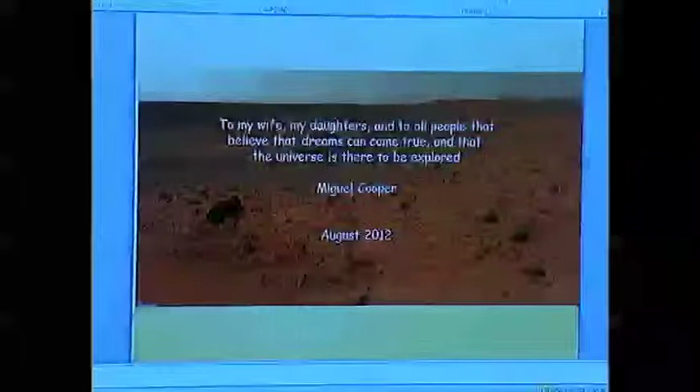Miguel Cooper, also known as Mike Cooper, wrote this presentation, and he opened with the following words, quote, "I would like to dedicate this presentation to my wife, who is here with me, to my daughters, and to all the people who believe that dreams can come true, and that the universe is there to be explored."

I would like to begin this presentation with this slide, which shows what can be achieved through the use of imagination, creativity, and science. Some of the great minds behind these creations have enabled mankind to advance and to look for better improvements. The author of this presentation, Mr. Miguel Cooper, or Mike Cooper, has included some thoughts which he finds to be quite interesting and inspiring.

From Viking to Curiosity, the exploration of Mars has gone from dream to reality. Imagination has made it possible for human beings to create these vehicles. This presentation will give us an idea of how human beings could set foot on Mars using today's technology and experience combined with new launchers, space vehicles, and emerging technologies.

The idea of this reconfiguration is to take advantage of the hardware which is already in orbit and to extend its use for this project. In fact, the ISS will continue its operations, but with fewer modules. Now, ISS stands for International Space Station.

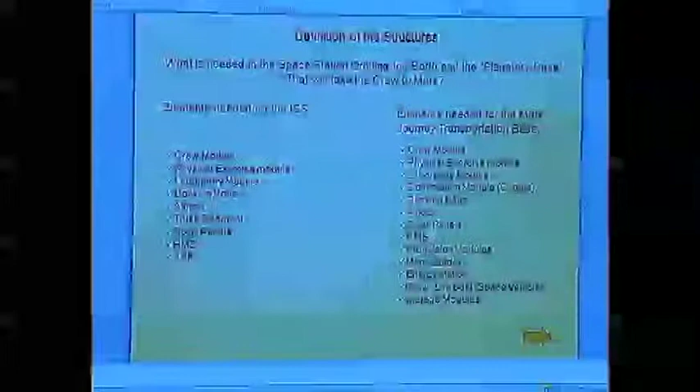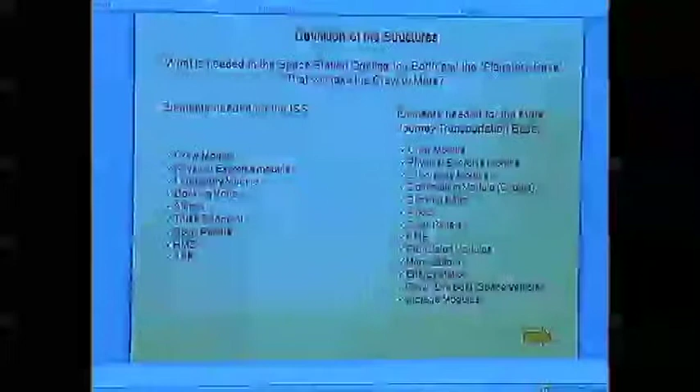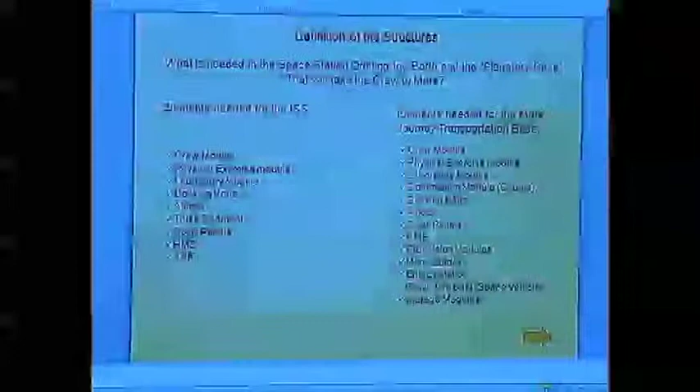So, additionally, new elements need to be defined, designed, tested, and sent into orbit. One advantage of doing it this way is the fact that the space vehicle can be tested while it is in an orbit around the Earth. Potential problems can be solved before leaving the orbit around the Earth, without going all the way to Mars.

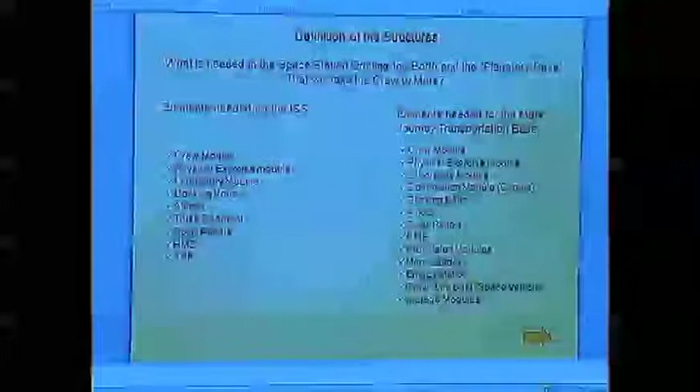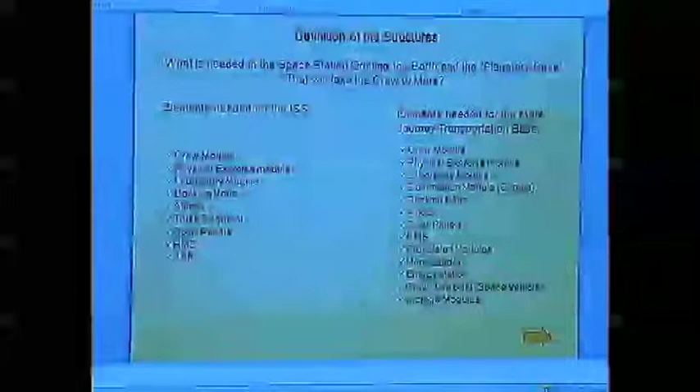Now remember, I told you ISS was the International Space Station. So a good knowledge of all the elements and modules which form the ISS, or International Space Station, today is required in order to be able to select the ones that make sense for the Mars project. We should keep the functionality of the ISS in mind. We should also remember the additional partners.

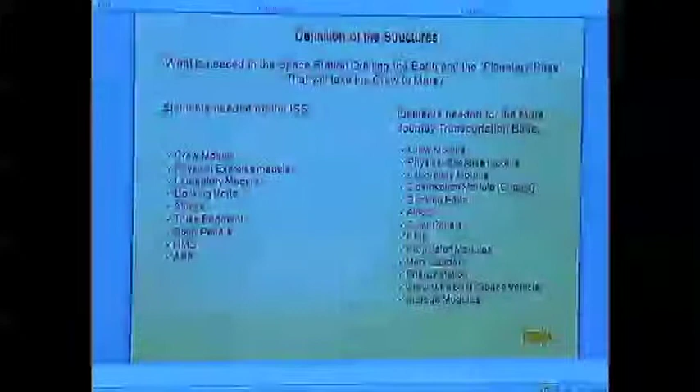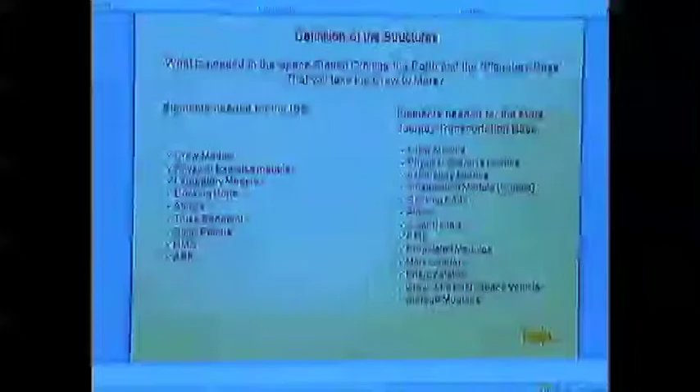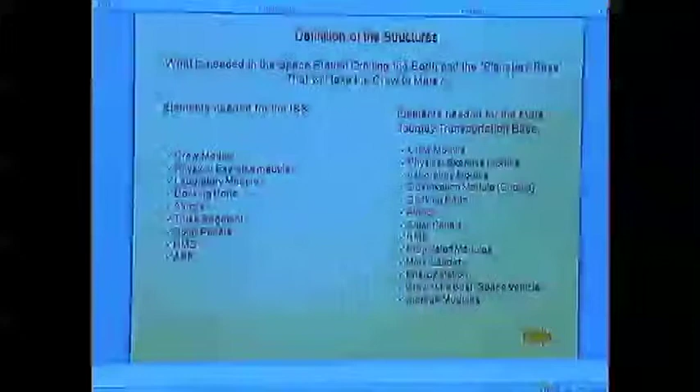First of all, we will identify the elements that the ISS and the MOS will need to operate and to complete their tasks. Now, for the benefit of those people in the audience who need to know what the letters MOS stand for, the MOS is the Mars Orbital Station. Just as the ISS is in orbit around the Earth, the MOS will orbit around the planet Mars.

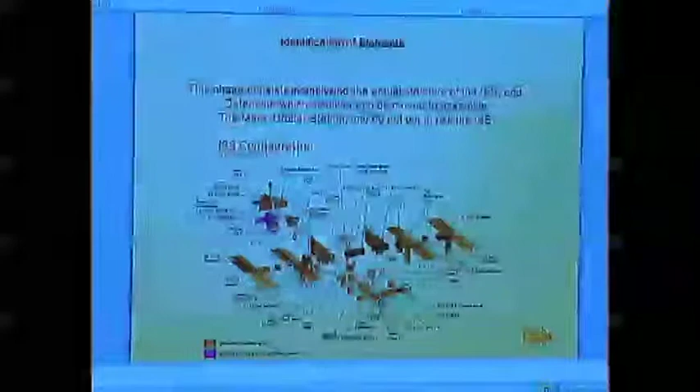A good knowledge of all of the elements and modules which form the ISS today is required in order to be able to select the ones that make sense for the Mars project. We should keep the functionality of the ISS in mind. We should also remember the international partners, the risks of each configuration, and the implications of reassembling the various modules.

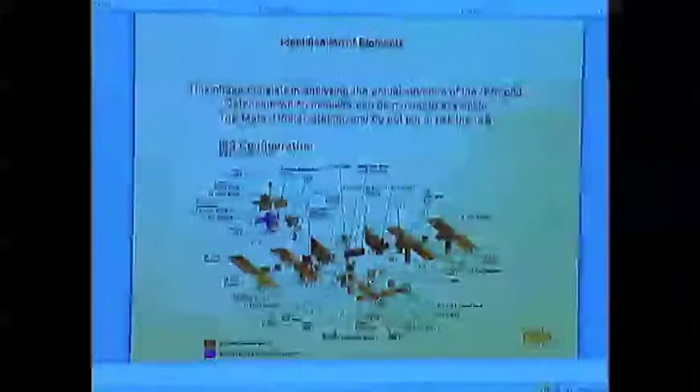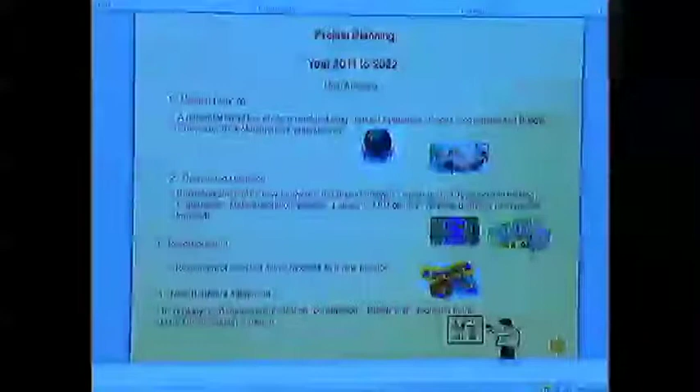As in the case of every project, this project has several major groups of tasks which need to be addressed. Using a time frame of 11 years, from 2011 to 2022, the main groups will include the following 4 task groups. Task group number 1 will be mission planning, and you can see it here on the screen. Mission planning is the first task group, and this task group will address the planning of the mission. It will define the objectives and goals.

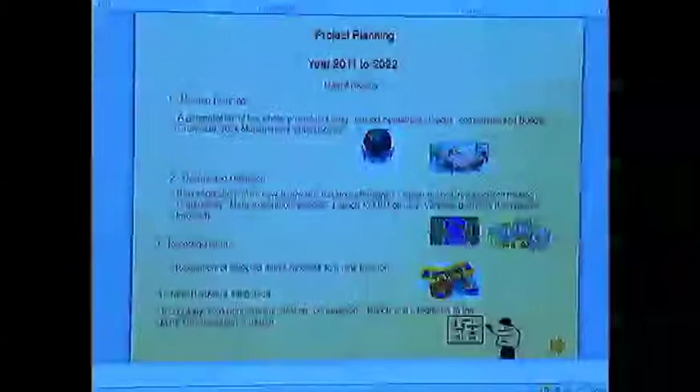It will develop a general consideration of hardware and people, including administration, mission control, crews, NASA and international partners, participation plans, the role of private companies, vehicle status, possible budget items on a yearly basis, etc. Task group number 2, which you can see on the screen here, is design and definition. This task group will arrange for the reconfiguration of the ISS and MOS, that is International Space Station and Mars Orbital Station.

It will define new elements, select companies to develop conceptual designs for launch vehicles, for spacecrafts, and for a Mars rover. It will organize a possible mission control team and define a mission control center on the Mars Orbital Station. It will evaluate risks. It will design the Mars exploration plan, and for both the minimum and extended missions, vehicles should be defined according to standard definitions.

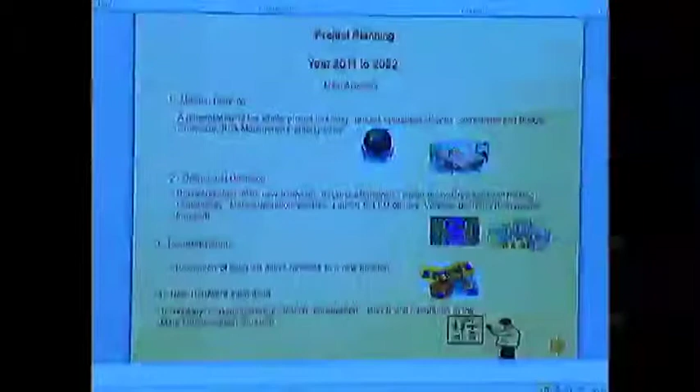It will design both the minimum and the extended versions of the Mars exploration plan. It will identify the supplies and parts which need to be included in storage modules. Task group number 3, that will be assembly. This task group will relocate ISS modules while building and testing new hardware. And task group number 4 will be the new hardware integration task group.

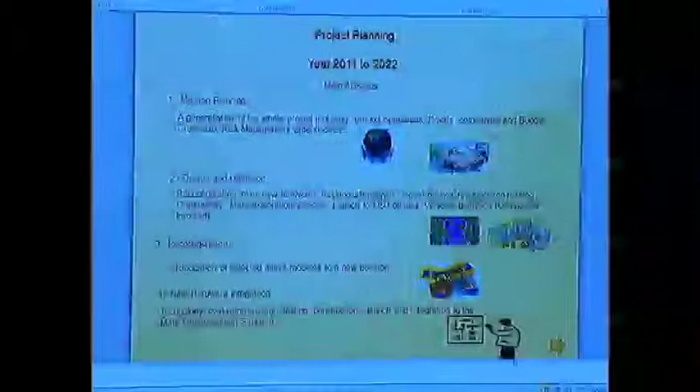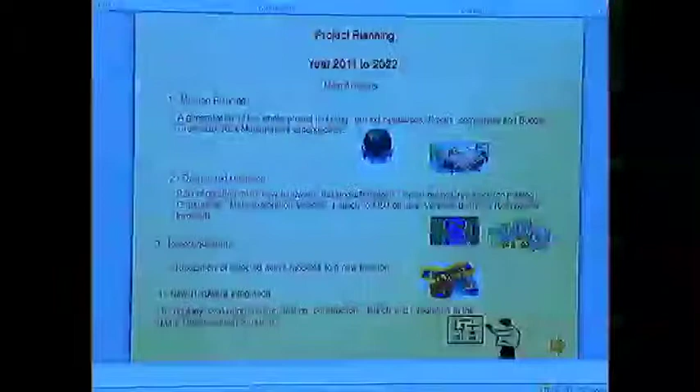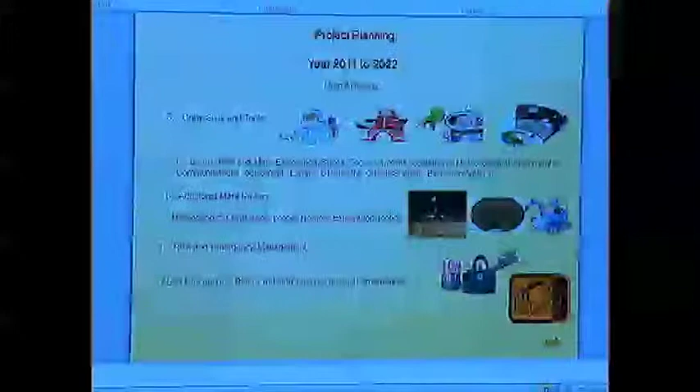This task group will test completion of the propulsion systems for the MOS, launch vehicles, crew space vehicles, Mars lander, rover, and return vehicle. It will also define a tentative schedule to launch and assemble these various components. Now let's talk about astronauts' tools and suits. This task group will design the suits to be used aboard the MOS for Mars exploration. It will design the tools needed for repair activities and for the exploration of Mars.

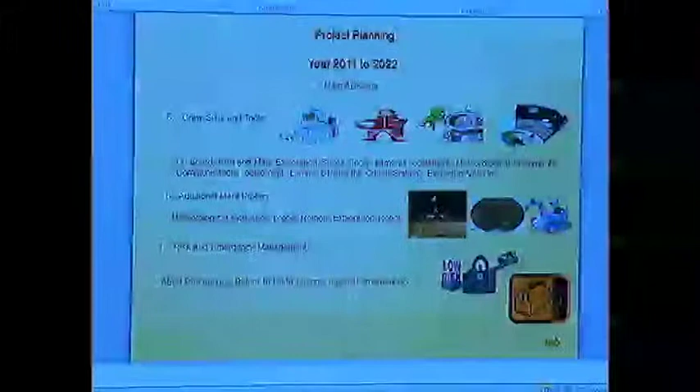Now you can see the additional Mars probes task group. They will consider if additional Mars probes need to be taken for atmospheric measurements before landing and for Mars observations after the crew departure. Also, it will consider what equipment may be left on Mars for unmanned exploration. And finally, you have the Risk and Emergency Management Task Group. A special group will be working on each stage to identify the risks of every phase and to develop the details of the abort and emergency plans.

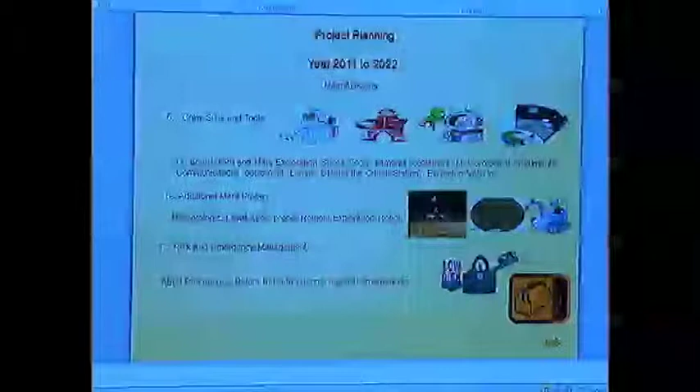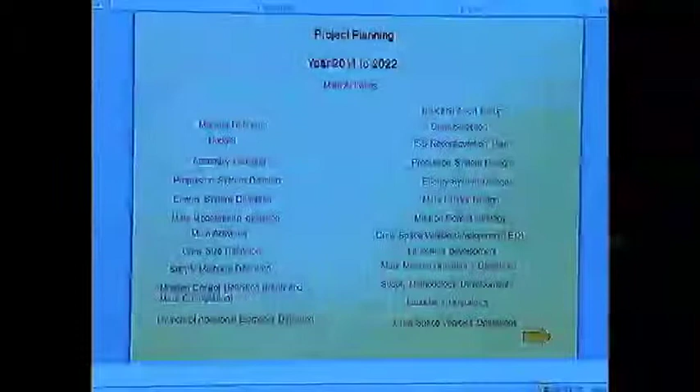These major groups of tasks are divided into more specific activities. As you already know, each activity will have its own project planning. These two slides will show some of the activities which should be included in this project. I will not go into all of the details for each one of these in this presentation. It would be too much detail. Now, once again, as in the case of the previous slide, these major task groups are divided into more specific activities.

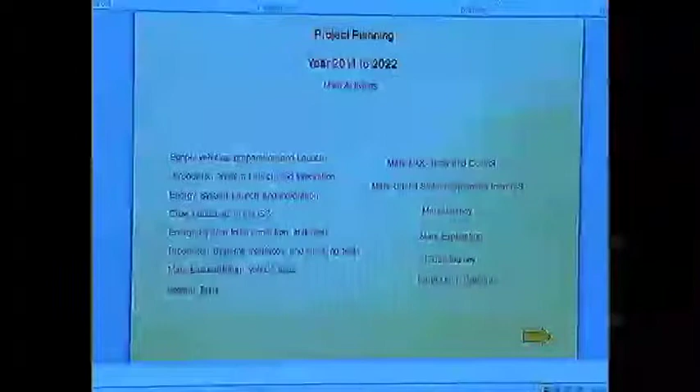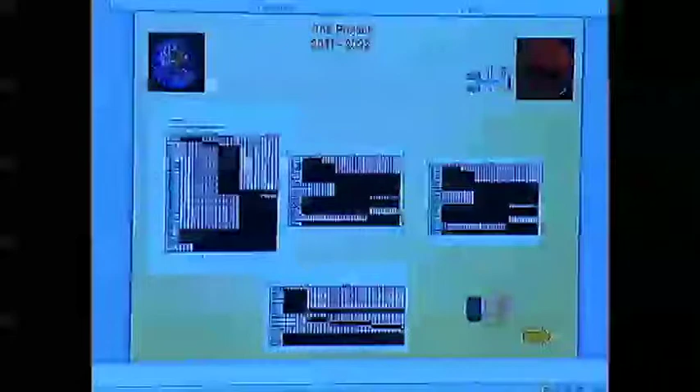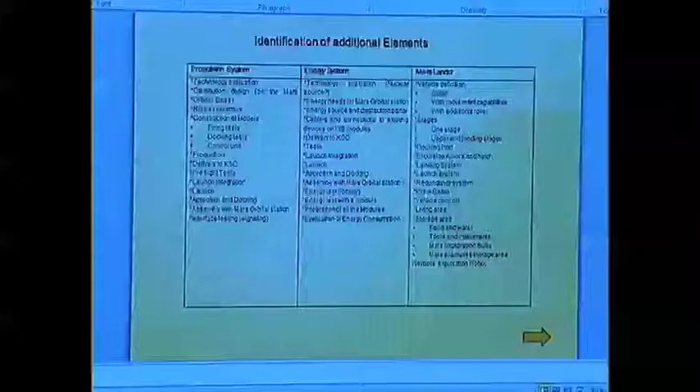The propulsion system will provide course corrections and speed reduction in order to enter into an orbit around Mars. After the exploration of Mars, this component will leave the Martian gravitational field for the journey back to Earth. Route corrections and speed decreases will be used in order to enter into an orbit around the Earth. Because the spacecraft will be traveling at a very high velocity through outer space, in order to enter into an orbit around the Earth, it would have to slow down.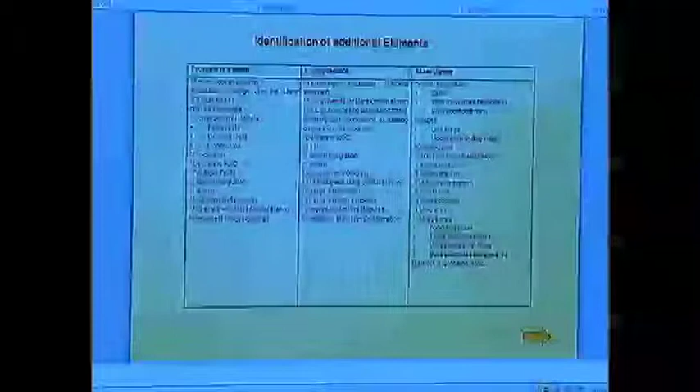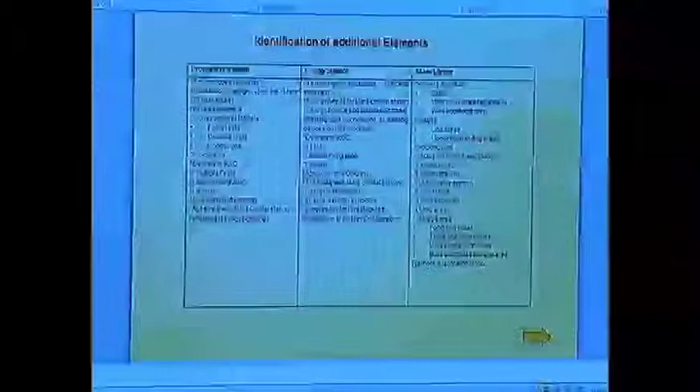Now you can see system number 2 at the top, the energy system. The energy system will be used to store energy and to provide energy to operate all the modules of the Mars orbital station. And then item number 3 says Mars lander. The Mars lander represents a combination of a lander, storage for tools and supplies, a rover, and the return vehicle. The use of each system involves an appropriate technology, concepts evaluation, manufacturer selection, design, prototype construction, and testing.

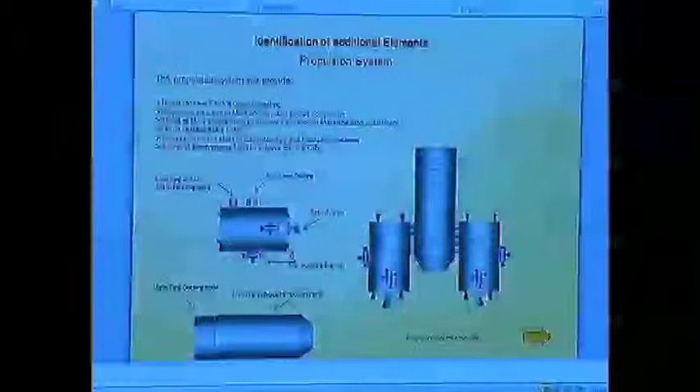Now here's the propulsion system. Let's expand on this. This system is formed by a module which contains propellant to feed 2 rocket systems. Each of these rocket systems has a main engine, secondary engines, and route correction engines. Inside is a propellant, which is to be used by the secondary and correction engines. The main module has the computers and interfaces which are needed to control the engines.

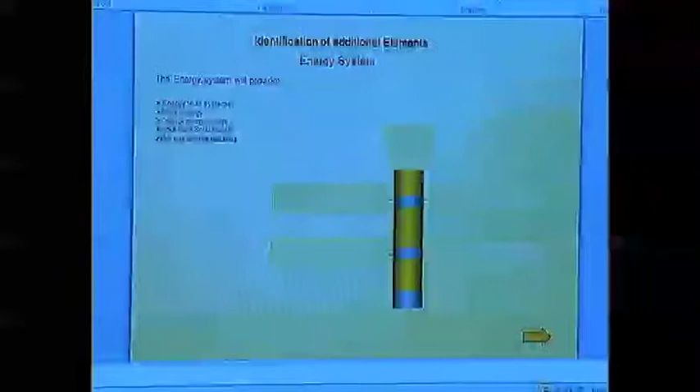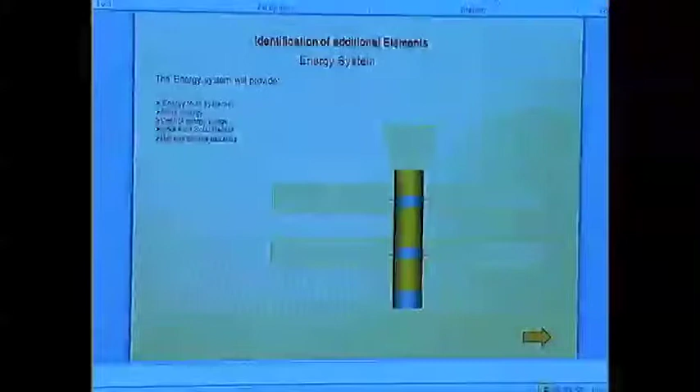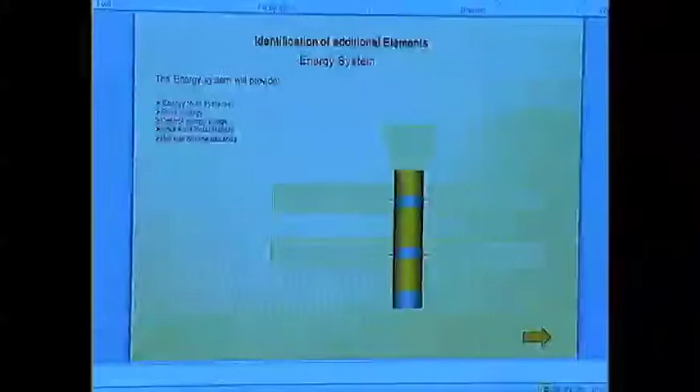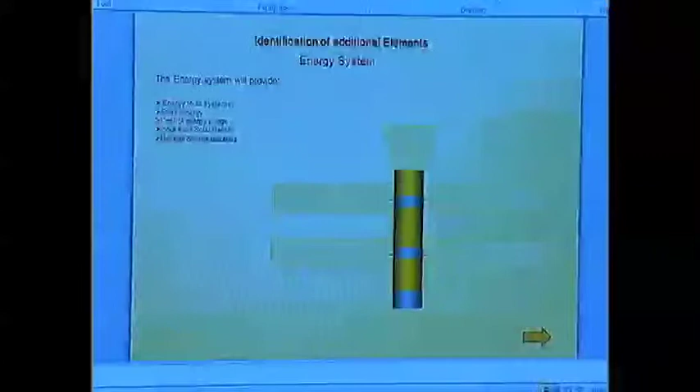All right, let's take a good look at the energy system here. The energy system is formed by a module with solar panels, which can be extended and retracted, along with the capability to follow the sun. This module is covered with solar cells in order to capture solar energy and to store it in its internal batteries, to be distributed to all systems.

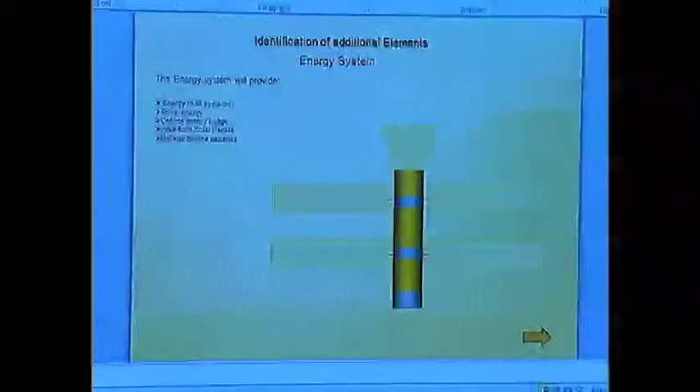The energy system will control its consumption of energy in such a way as to guarantee that there will be an available supply of energy for all the critical systems.

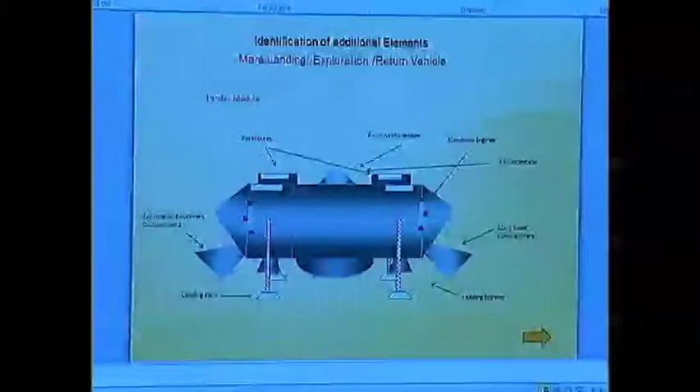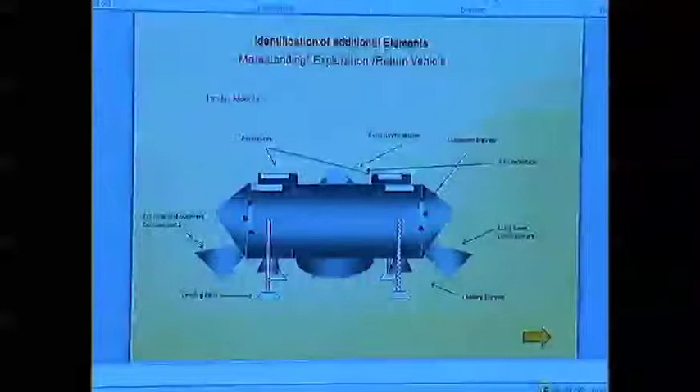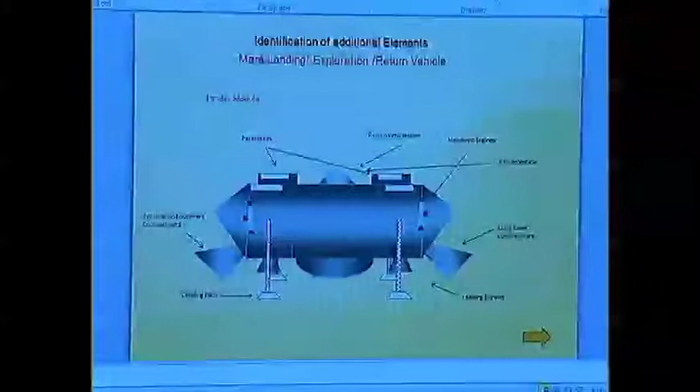All right, now let's talk about the Mars Lander Return Vehicle. This module is formed with a lander structure, which contains the return vehicle, a container for tools and supplies, and a roving vehicle container. This structure will provide a soft landing when landing on Mars. Once on the surface of Mars, this vehicle will open the tools and the rover containers. The central section will expose the crew compartment, and that compartment is the return vehicle.

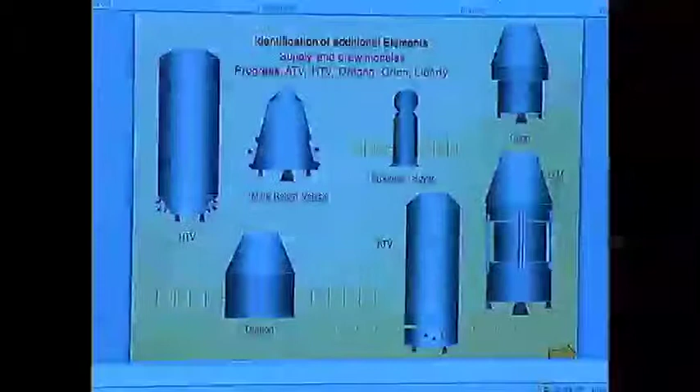The MOS, or the Mars Orbital Station, has the Leonardo Multi-Purpose Logistic Module. This module will be loaded with supplies and parts. All of this material will be placed in an orbit around the Earth while the Mars Orbital Station is docked to the International Space Station.

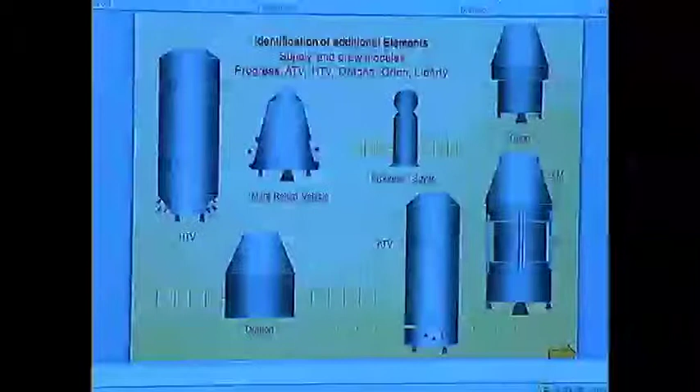The crew will arrive at the ISS in one of the MOS docking vehicles. This vehicle could be a Soyuz, an Orion, a Dragon, Liberty, or some other vehicle. This vehicle will remain with the Mars Orbital Station structure for the return of the crew to the Earth's surface. One possibility could be the use of the Liberty crew and logistic module for this operation, using it as a return vehicle "lifeboat" in case of an emergency.

Also, an additional cargo vehicle can be sent to dock with the Mars Orbital Station to be taken on the journey as an additional supply module.

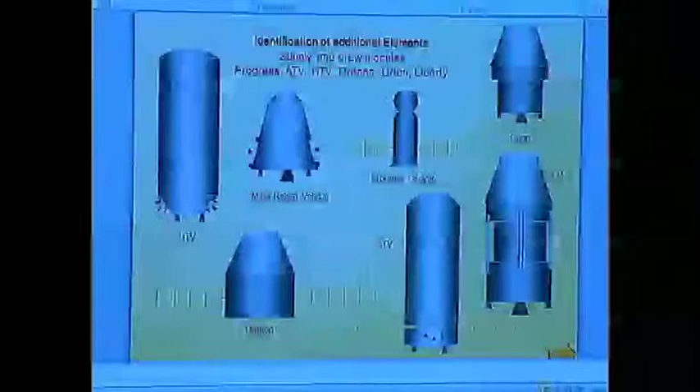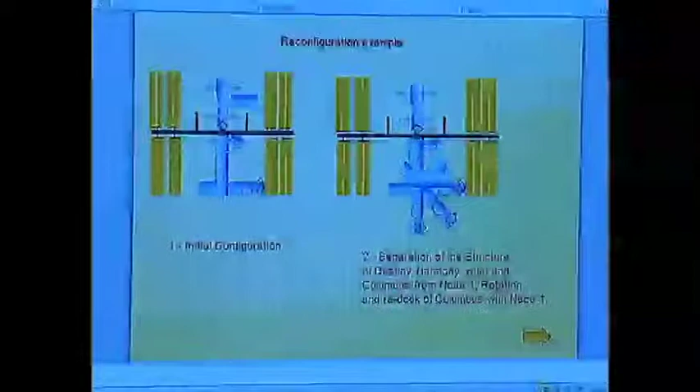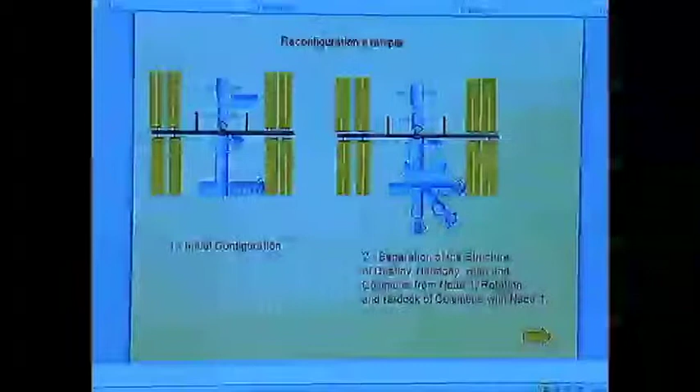The following sequence of slides illustrates the possible reconfiguration process of the ISS to create the MOS and the arrival of additional elements. This first one shows a schematic representation of the ISS and the selection of the modules that will become the habitational part of the MOS, including the separation of the structure of Destiny, Harmony, Kibo, and Columbus from Node 1. It will make a 90-degree rotation and redock with Columbus on Node 1.

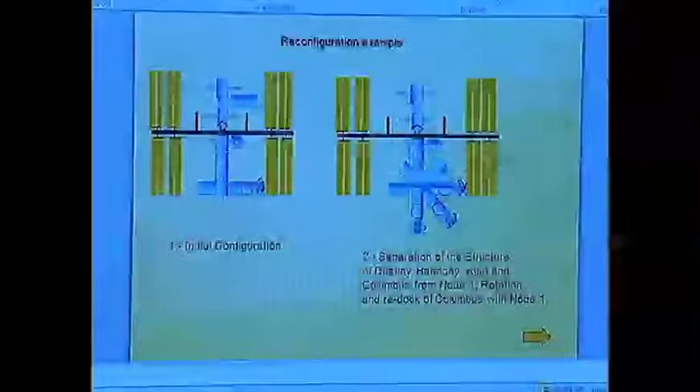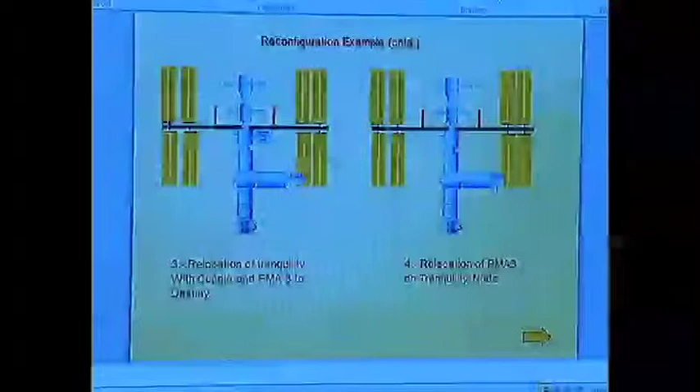Tranquility is moved from Unity and docked to Destiny. Tranquility has a cupola and docking port, PMA3. This port is repositioned on Tranquility. The Leonardo multi-purpose logistic module is moved from Node 1, that is Unity, to Node 2, that is Harmony. This module will store supplies and spare parts for the voyage.

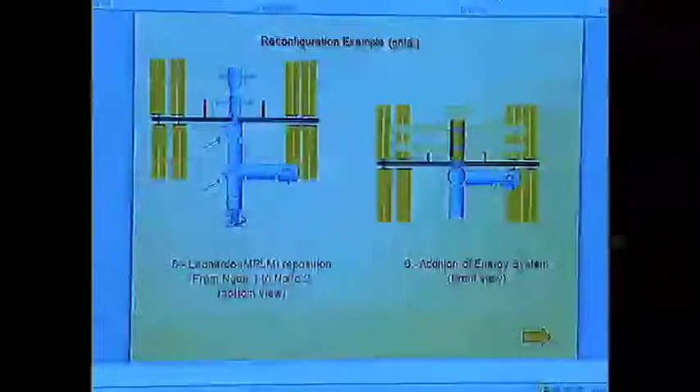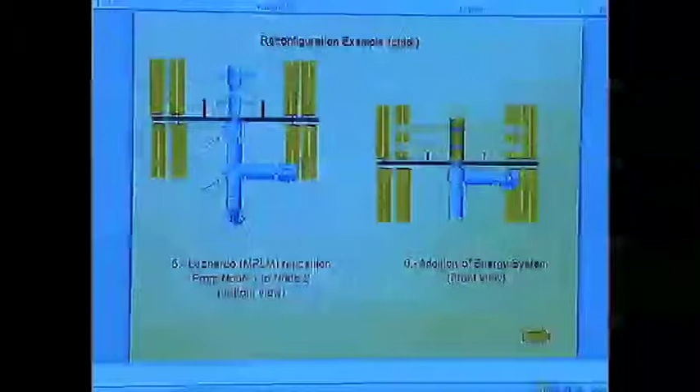On your right is the arrival of the energy module for the MOS segment. It is docked to Node 2, and that is Harmony. This is a view from the front. Leonardo, remember, is the multi-purpose logistic module. Leonardo is across from the energy module. Destiny and Tranquility are on the right. The crew will set up all the connections to distribute energy.

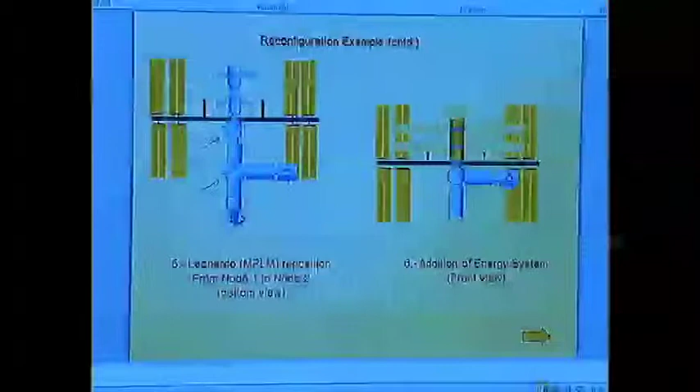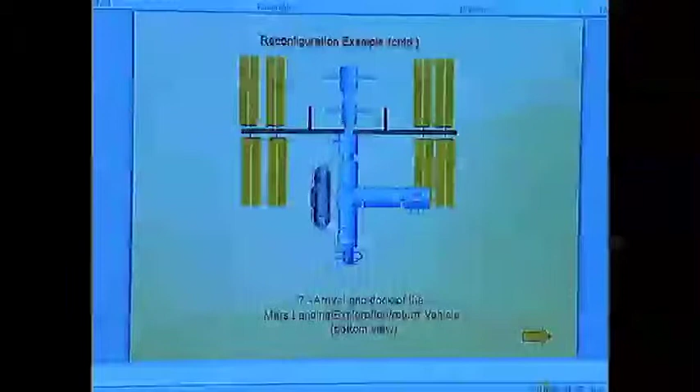Now we're going to talk about the arrival of the Mars lander structure. In this view, the Mars lander structure is docked to the front of the Harmony node. At this moment, in this illustration, the landing pads are retracted. All right, here we can see an additional docking port has been attached to the Tranquility node.

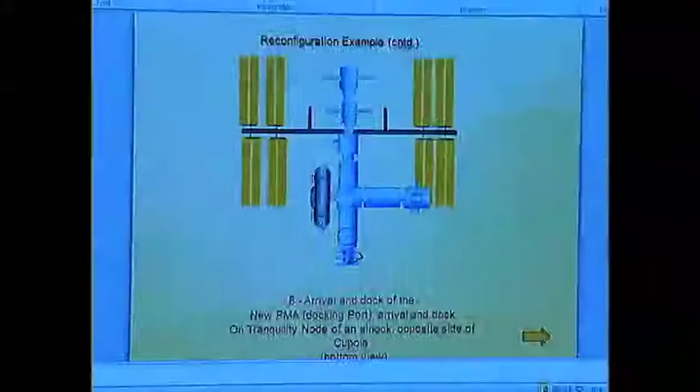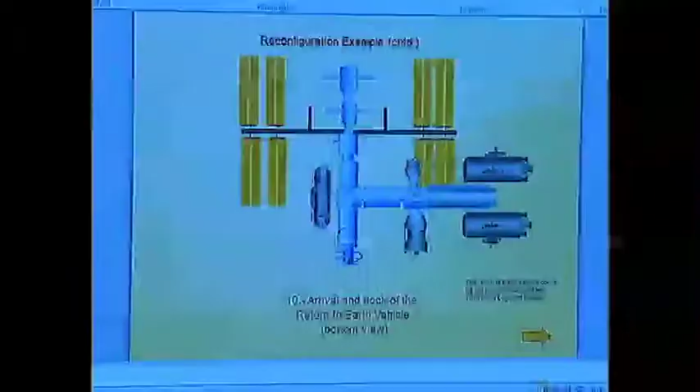A crew will arrive in the vehicle that will take them back to the Earth's surface at the appropriate time. This vehicle could be the Orion, the Dragon, the Liberty with the logistics module, or another vehicle which could be in development at the present time.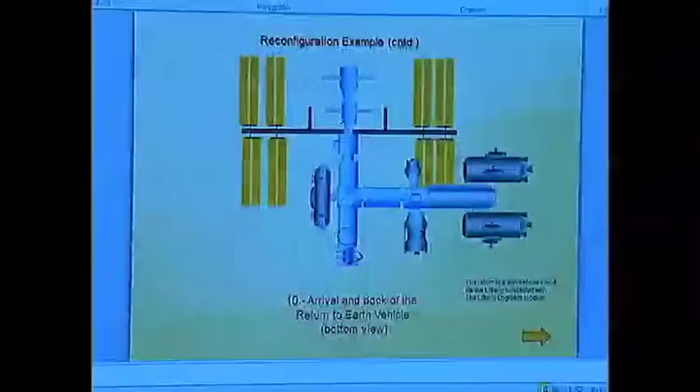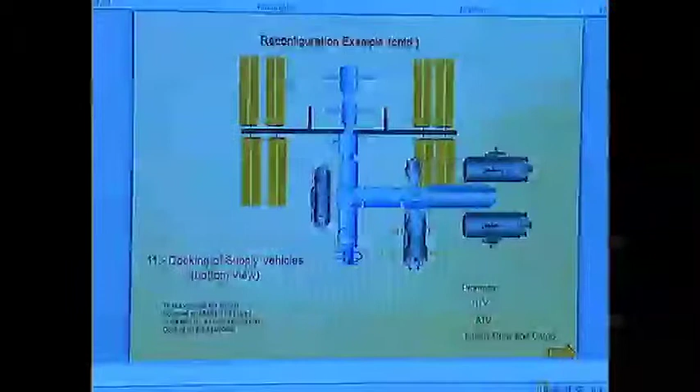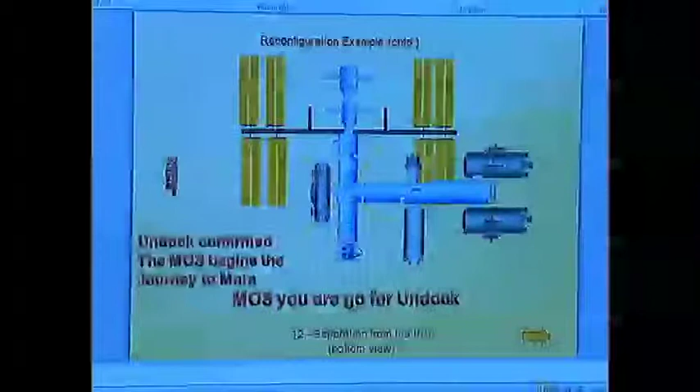At this time, the crew will be checking all of the systems, and supply vehicles will arrive. The crew will move the supplies and tools to the Leonardo module. If necessary, one of these vehicles can become a part of the MOS for additional supplies. Once all systems are verified, the MOS crew will move into it, and hatches will be closed and sealed.

I hope that you have enjoyed this proposal. This concept represents a combination of existing technology and new and emerging technologies. Perhaps we will see a human presence on Mars during the course of our own lifetimes.